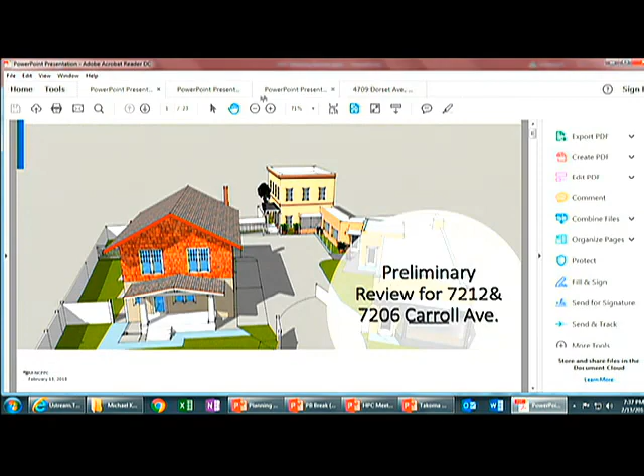The chairman has returned. Thank you, Vice Chair. The first case we're going to hear this evening is case 1A at 10201 Menlo Avenue in Silver Spring. The staff report.

The Capitol View Historic District divided the resources into 4 categories based on age. They do not actually designate different levels of review based on the time period. So as you can see, the vacant property with a red dot is the subject property.

It is surrounded on 3 sides by other buildings. In the southeast corner is the 1895 house that this was originally a portion of. To the southwest, there's a 1993 building. All along Loma, which is the east-west street, there are 1953 houses. To the north is a 1989 house. Across Menlo Ave is actually outside of the historic district. Additionally, to the east of the subject property is also outside of the historic district.

In 1985, the planning board subdivided the large lot into 6 different parcels to what we see today. There's the original plat. So up along Menlo Avenue, there are a variety of houses, largely Victorian in nature. Many were constructed in the 1920s. There's some infill from the 1980s, and then what you see is the subject lot. This was taken, I believe, in October when everything was largely overgrown before the leaves changed.

Basically to the left of where the garbage cans are is where the proposed entrance to the lot will be. And this is looking into the lot now. These were taken in January. You can see up on the rise is where the proposed construction is. The lot's largely overgrown, with a fair amount of change in elevation.

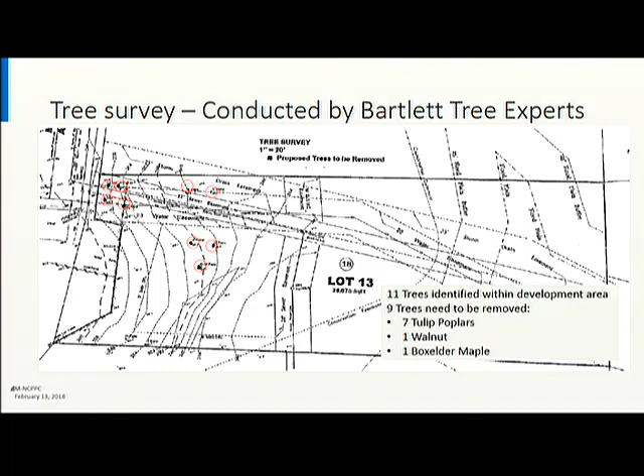So the applicant has conducted a tree survey. They've identified 11 trees that are within the development area. 9 of them will need to be removed. Their species are identified. As you can see, the first 4 are in the only location where a driveway can be on the lot, so if any access to the lot has to be provided, those trees will need to go.

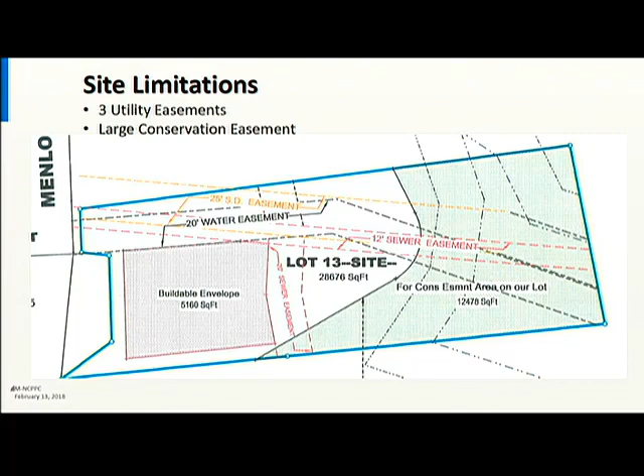There are also significant building limitations on the site, as there is a large conservation easement shown in green, and there are storm drain easements, water easements, and sewer easements, leaving only a 5,160-square-foot buildable envelope on the lot, which is in the southwest corner.

So the applicant's proposing to construct a single-family house. This is a previous version. The applicant's revised some design elements in it.

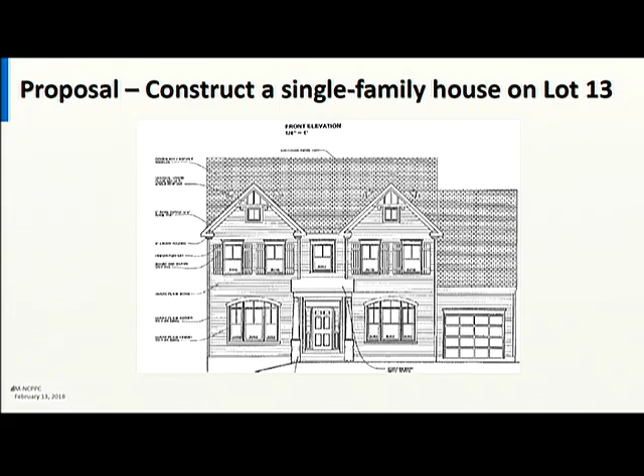The standards of review are the Capitol View Historic District Guidelines, Chapter 24A8, and the Secretary of the Interior standards, particularly the ones related to new construction, which are standards 9 and 10.

Just want to point out special considerations. We don't see Chapter 24A8C very often, where it's not the intent of this chapter to limit new construction, alteration, or repairs to any one period or architectural style. Additionally,

24A8D states that in the case of an application for work on a historic resource located within a historic district, the Commission shall be lenient in its judgment of plans for structures of little historical value or design significance, or for plans involving new construction, unless such plans would seriously impair the historic or architectural value of the surrounding historic resources, or would impair the character of the historic district.

So this is the current design. It's basically a 2-story rectangle. There are bay windows on the first floor. It's a side gable house with 2 front-facing gables. The house will be clad in Hardie plank siding with Hardie shingles in the gable.

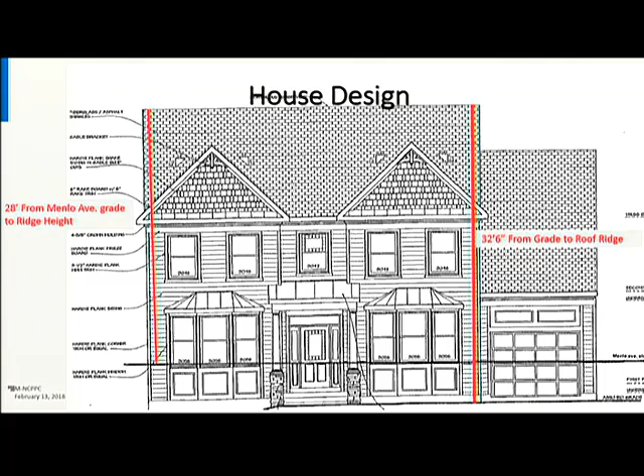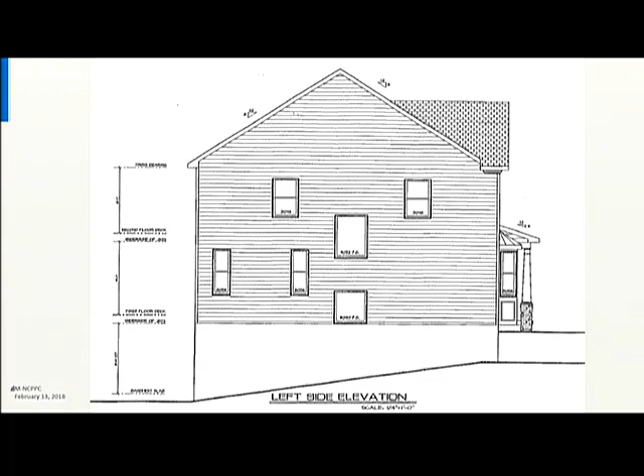The right elevation, which is south-facing, includes the garage, which is why the garage roof is at a 14/12 pitch as opposed to the 8/12 of the main roof ridge. This is the left elevation, which is largely blank. And then at the rear, the applicant is proposing to put a deck that's not included in the elevation drawings, to better show the basement level.

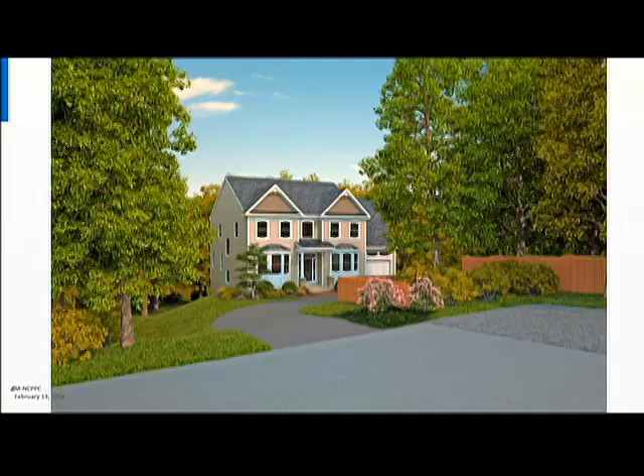So this is an architectural perspective provided by the applicant showing what you would see from right at the corner of Menlo and Loma Avenue. The house is plainly visible, the garage is partially obscured, and you can see in this drawing the steep elevation slope down as the lot moves east.

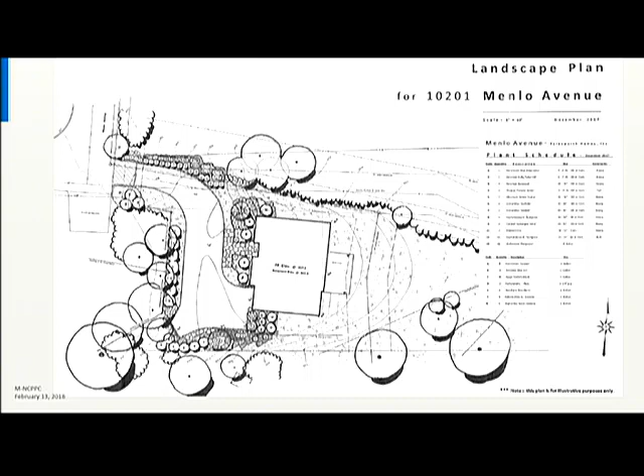And the applicant's provided a landscape plan. You see a large driveway and parking area. Because this building site does not provide any street front parking, the applicant's indicated the need for off-street parking on the building site, and that's where he's coming from with a 1-car garage and additional parking location in front of the house.

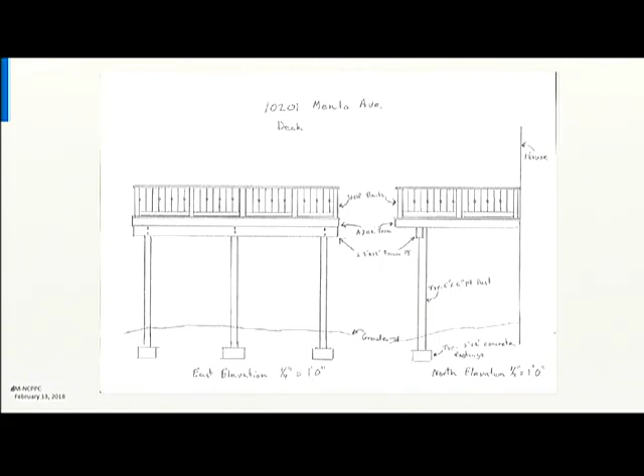The deck will be built on stilts, proposing to use a wolf rail, which is a metal rail, and then the fencing that they're proposing on site is a vertical privacy fence. It will range between 6 feet and 48 inches, depending on where it's going to be located on the site.

As you get to the space between 10205 and 10203, it grows to 38 feet between the houses. And then the space between 10203 and the proposed house is actually 60 feet, from wall plane to wall plane.

The applicant was also asked to provide details regarding the size and scale of the proposed house compared to what's around and adjacent. The breakdown of these numbers shows the house is generally consistent with the amount of impervious surface. You're seeing about 14%, give or take, of impervious surface for the proposed lot. The surrounding lots vary from 10% all the way up to 29%. So this is generally consistent with the surrounding area.

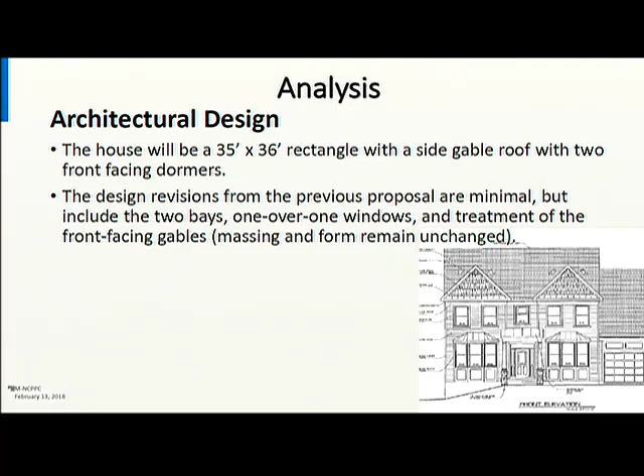Again, the house will be a 35-foot by 36-foot rectangle with a side gable roof, 2 front-facing dormers. The revisions that we see to the previous submission are minimal. They include the bays. They've gone to a 1/1 window from a 2/1 window, and then the treatment of the front-facing gables has changed. Massing and form have remained unchanged.

Staff supports approval of the design based on 24A8C and D.

Again, site work, 9 trees are proposed for removal. Due to the limitations of the building site, staff finds that a denial of the tree removal would deny the applicant any reasonable use of the property, which is what's outlined in 24A8B5.

And the tree canopy ordinance for the county requires that 9 trees be planted on the site or money paid in lieu of planting. Staff has spoken with the applicant, and the applicant would like to plant as many trees as will fit. He believes that 9 may be too many. He's here and may be willing to respond to that. And I've encouraged him to reach out to neighbors to discuss the species and placement of these new trees.

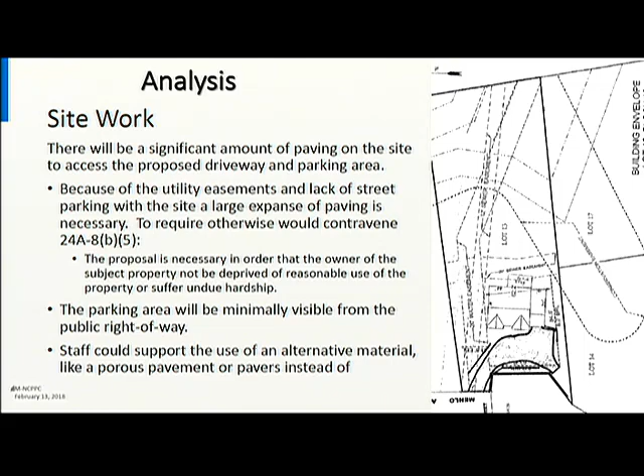Again, significant paving because of limitations for street front parking and building placement. The parking area will be minimally visible from the public right-of-way because it is both below grade and set to the south of Loma and back from Menlo. Staff would be supportive of an alternative material like a porous pavement or pavers. Instead, the applicant proposes asphalt currently.

Staff finds the proposal is compatible with 24A and the Secretary of the Interior standards and supports approval.

Again, there were several comments presented that had concerns about the massing of the design. The applicant provided several different configurations of the house and determined that an L-shaped plan or a T-shaped plan would not fit within the buildable envelope of the lot. And staff believes that the limited visibility from the public right-of-way will not significantly impact the streetscape on either Menlo or Loma within the historic district.

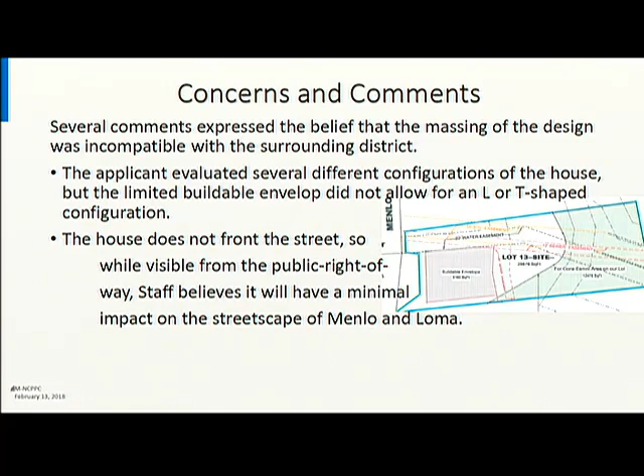There's been previous testimony submitted regarding water control measures for runoff and sediment control. These are not purview of the HPC, as all of the water control measurements will be below grade and will not be visible, so this is not a visible change for the district. Additionally, the sediment and erosion plan is required and will be reviewed by DPS prior to the issuance of any construction permits, so that again is not part of HPC's purview.

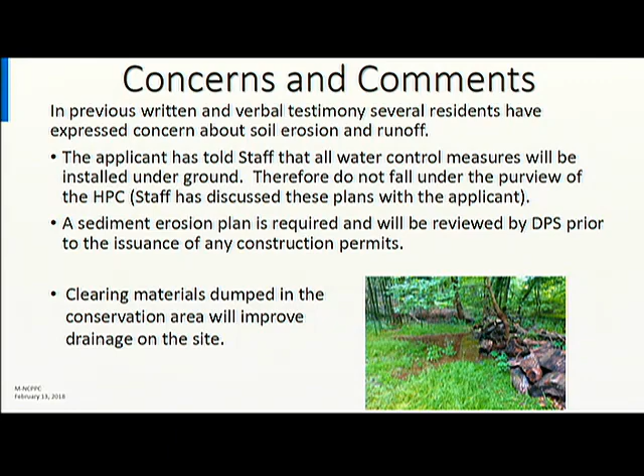Staff further believes that the materials that have been dumped in the lot will be removed, and that will improve drainage on the site. And are there any questions for staff?

Mr. Chairman. Thank you, Mr. Chairman. On the streetscape diagram that you gave us earlier,

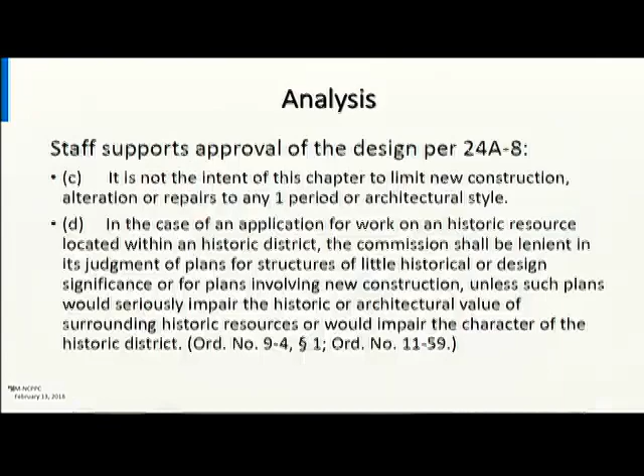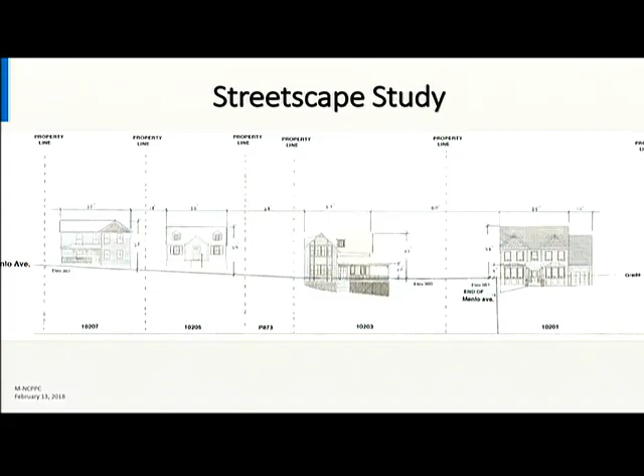Can you tell me the construction date for the houses on that street? So 10203 is 1989. 10205, I believe, is 1926 or 1929, and 10207 is another house that was constructed in the 1920s. I believe I have that on an earlier slide. There we go. So yes, that was correct. Okay.

All right, thank you very much. Any other questions for staff?

I have one question. At the end of the conservation easement on the lower portion of the lot, I believe it actually comes, and you see it in the plan you just had, it comes up to another street, and I'm not sure the name of that street. Is it in the historic district? So the rear property boundary is the terminus of the historic district. So if you're looking at the current plat, on the right side, what is labeled Loma is outside of the district.

Okay. Thank you. Any other questions for staff? If not, we invite the applicant, please come forward.

We can give you. Mr. Chairman, as the applicant comes up, I just wanted to let the commission know that our timer is not working. Yes, so staff will be, oh, you got it? Well, I'll run one too. Why don't we both run one and we'll compare notes. So we can give you 7 minutes for your testimony.

Thank you. Okay. My name is Minner Farnsworth. I'm the applicant. I would like to reiterate everything that your great staff did. I agree with their recommendations, and I see we have a lot of people to talk, so I'm going to turn it over to you guys to bring them up.

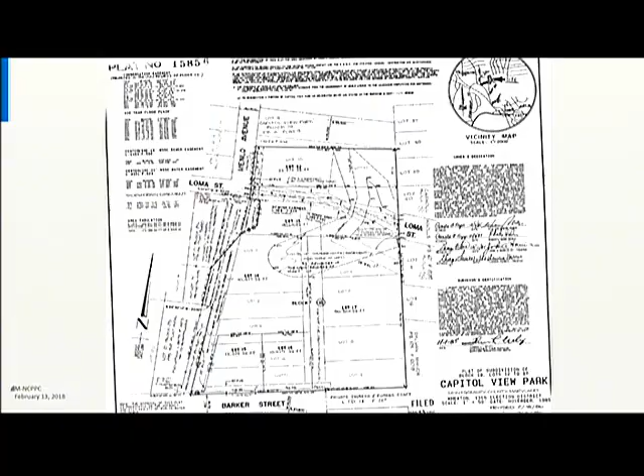And could you go back to the subdivision slide for a moment? The subdivision slide, or? The one that was in the designation plan. Oh sorry, the Capitol View survey. Yeah, the survey, I'm sorry, the approved historic district.

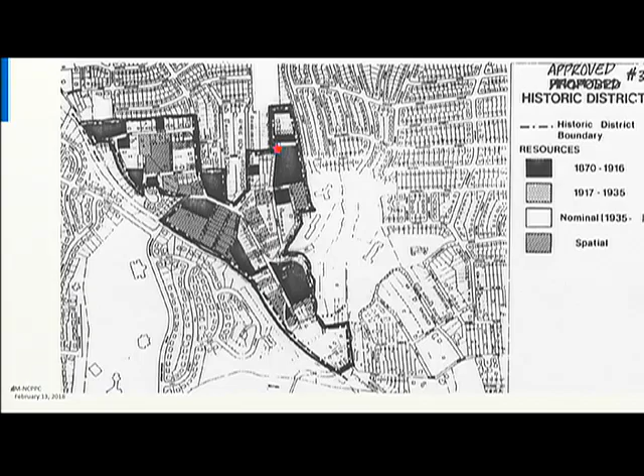Is the star obscuring the lot, or is the lot part of it? The star is covering both 10201 and the access point to 10203. And 10201 is shaded how? It's black. If you look at the trapezoid that's created, it is the same trapezoid shown here. Okay.

This is a buildable lot, yes. And the zoning is by-right zoning, is it not? Correct. So we do not have the authority to withhold approval unless the conditions in the ordinance are met. Is that correct? Yes, the review is done under Chapter 24A and the Secretary of the Interior standards. If the HPC does not find that the proposal meets those criteria, they could add conditions to bring it into conformance, or deny it. If they find that it meets those criteria, then approval is in order.

And in 24A-8(d), the commission is required to be lenient in its judgment of plans for structures of little historical or design significance, or for plans involving new construction, unless the plans would seriously impair the historic or architectural value of the surrounding historic resources.

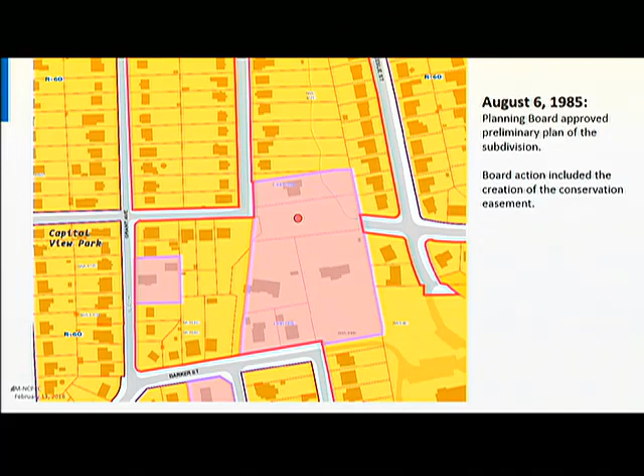Across the street, outside of the historic district, are a number of very small bungalows. On Menlo, you have a range. You have pseudo-Victorian, you have a nice sort of 1920s farmhouse, you have some bungalows. And this seems out of proportion to that side of the street, which is, in my understanding, in the historic district. Although I have to say I got a little confused about the district.

So I have problems with this proposal as it's been presented, and I look forward to learning more about our authority regarding trees, because I feel very strongly about trees.

To begin with, I would like to compliment the community's interest and the intensity of its presentations. And there's a great deal of validity, I think, in the observations that the community has made.

However, it's our responsibility to respond to an application, to respond to a design, and we cannot design what we think would be best for the lot. And in terms of compatibility, which is perhaps the most important aspect of what we have to do, I would agree with Commissioner Firestone that this is

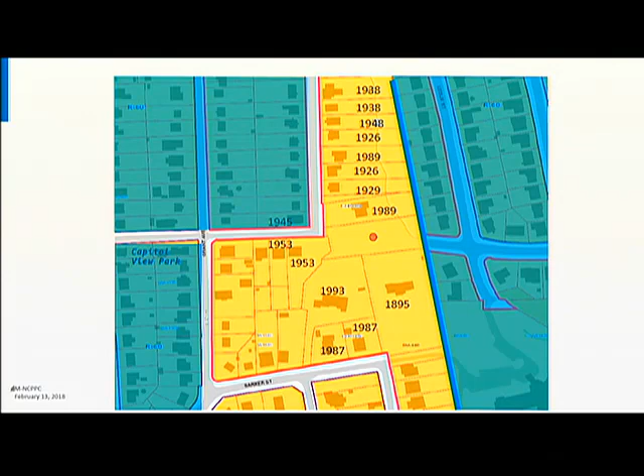We'll move on to the next item on our agenda this evening, which is preliminary consultations, case 2A. Case 2A, which is at 7714 Takoma Avenue in Takoma Park.